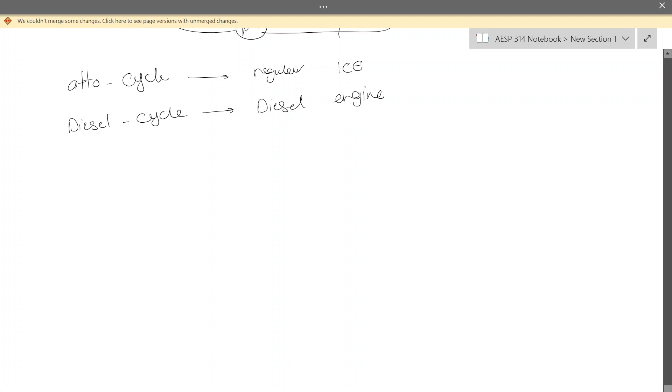We are mainly focused on 3 different cycles today: the Otto cycle, which is the regular internal combustion engine; the diesel cycle, used in diesel engines; and the Brayton cycle, which is used in jet engine design. We talked about these a little already, and some of you mentioned the differences and why they exist between the two. We are actually going to see what those differences are in the cycle.

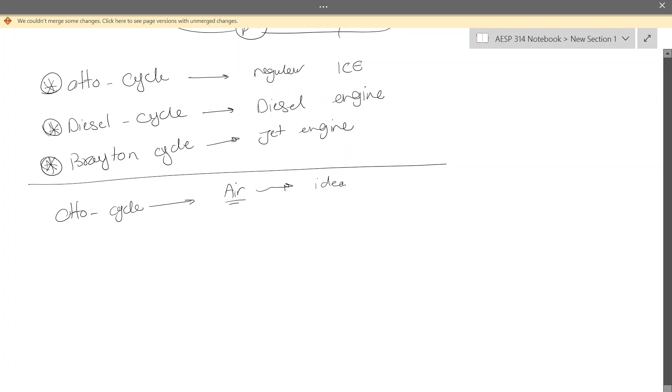Okay, so let's start with the Otto cycle. For the Otto cycle analysis, and for most of the analysis here, we are going to use air as the working fluid, but we will assume air is an ideal gas. This part is actually more important: we are going to replace the combustion process for the Otto cycle specifically with just an instant heat transfer. So heat is transferred instantly to the system, we don't really analyze any combustion here, and there are no exhaust and intake processes. All of the processes here are internally reversible.

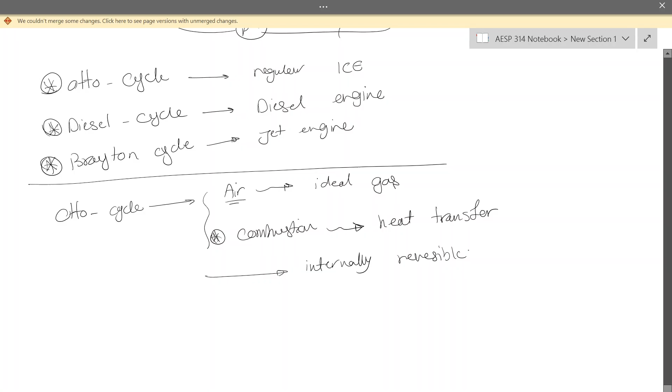We also have an addition to all of these assumptions, called the cold air assumption. In some cases, not always, we're going to use this cold air assumption, which is a very simple assumption: it essentially means that Cp is independent of temperature, so we're going to use a constant Cp for our analysis.

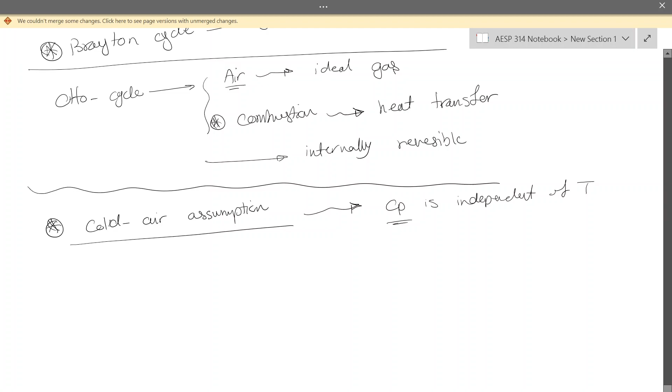Let's do a small review of the formulas we are going to use for this analysis. The first one is the ideal gas law.

Who can tell me what was the equation, the main equation? Yes.

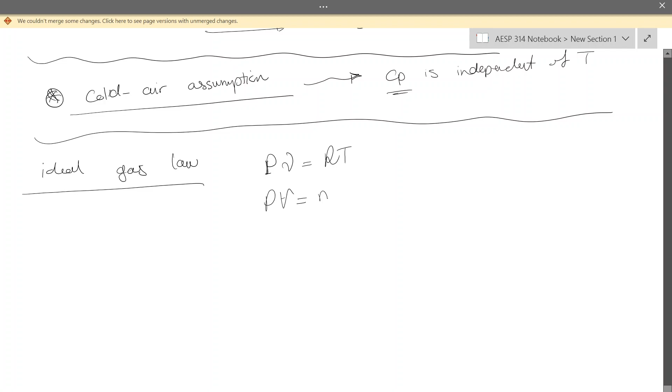PV equals, in aerospace or mechanical engineering we usually use specific volume and RT, or we use real volume and MRT. The reason is we don't really use the universal gas constant, we use a specific gas constant. In this case, it's air.

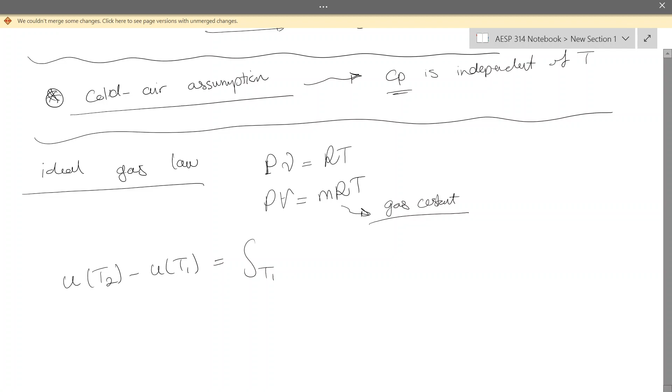We also had the definitions of internal energy and enthalpy. Internal energy at state 2, and these states are identified by their respective temperatures, is going to be equal to the integral of the changes in internal energy, integral of T1 to T2 Cv dt. This is for internal energy.

And also enthalpy difference between station 1 and station 2 is going to be the integral of T1 to T2 Cp dt. So if we apply this cold air assumption, we can actually move the Cp and Cv out of the integrals and take the integral. It is going to be a very simple integral.

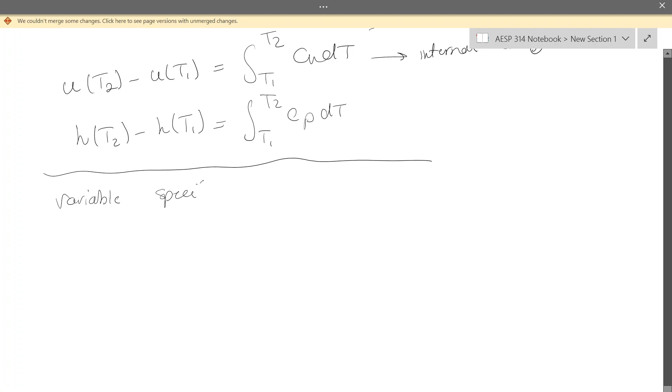That's C of V, that's the heat capacity at... Is this what you are referring to? This V here is a subscript. It stands for the fact that this C, this specific heat, is measured during a constant volume process.

Okay, the same is true for Cp, that's C of P. Yes, exactly, that's the idea. That's the assumption, right? So we can actually move the Cp and Cv out of the integral.

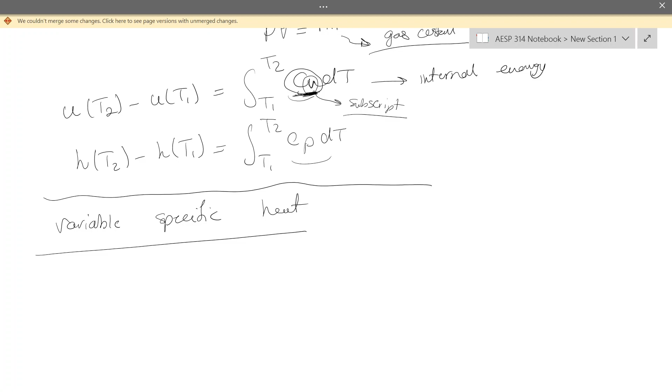Heat capacity in general is constant, it doesn't change with temperature. That's the cold air assumption. But if we could not use the cold air assumption, it is going to mean that we are going to have variable heat capacity.

This variable heat capacity, you can use a host of resources to actually find the relationship between heat capacity and temperature. One of the more famous ones is the NIST or NIST webbook. I have referred to this in the lectures. I'm not sure if you're familiar with the NIST webbook though.

Are you guys familiar with this? It's essentially a computerized thermodynamic table, and it's very complicated. You can just search for this NIST, you can go to the website.

It has a learning curve, so you have to play with it a little bit. But there's nothing scientific to the table itself, it's just you have to understand how to read the data entries and all of those things. It's very useful, you can actually get all of the careful data from this NIST webbook.

Okay, so let's move on with the equation reminders. The other equation we want to talk about is the entropy change.

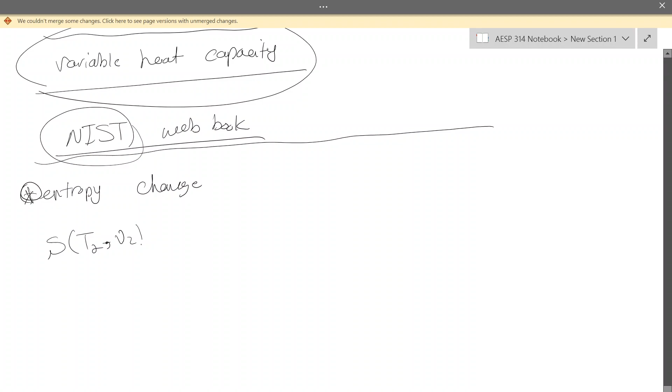Entropy at T2 and V2 minus entropy during station 1, T1 and V1, is equals to, we had two equations for it if you recall. One was the integral of T1 to T2, Cv of T dt divided by T, plus R natural log of V2 divided by V1. And also the other equation is a pressure-based equation.

So what will happen to these equations if we can assume Cp and Cv don't change with temperature? Let's make the assumption. What will happen to this equation? This is a question for the class.

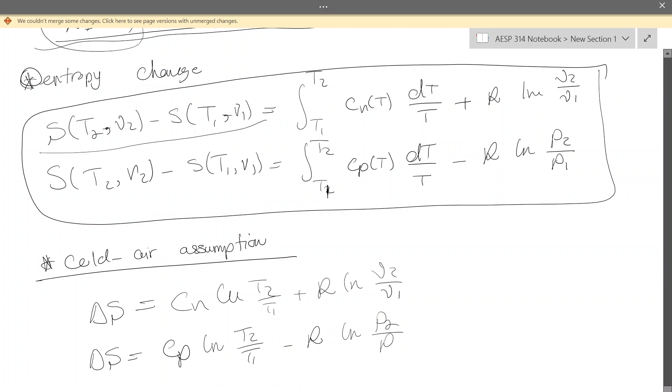or it's going to be Cp, and again this is C of V, C of P, that's a subscript. Natural log of T2 divided by T1 minus R natural log of P2 divided by P1. Okay, so

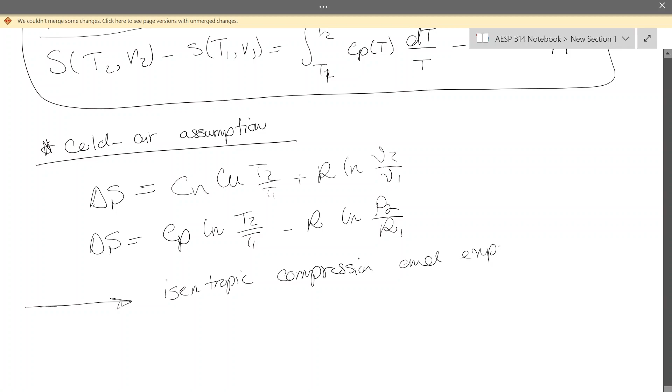what will happen to these equations for isentropic compression and expansion? Exactly. Since it is isentropic, it is adiabatic reversible, and the reversible part is telling us that the delta S is going to be equals to 0.

So 0, Cv... and we are already assuming that it is cold air. All of this is going to be equal to 0 after this assumption. Okay.

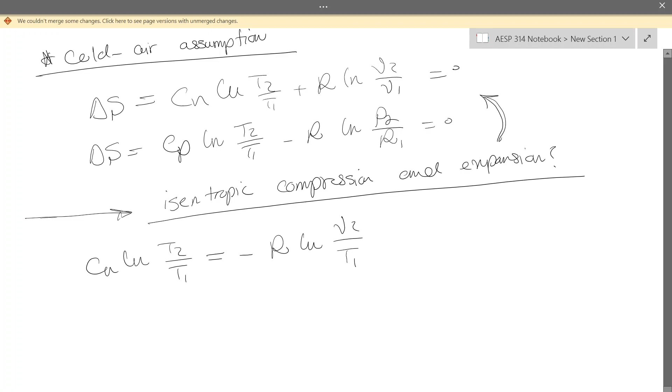So Cv natural log of T2 divided by T1 is going to be equal to negative R natural log of V2 divided by V1. The same is true for the second equation: Cp natural log of T2 divided by T1 is going to be, this time, positive R, P2 divided by P1.

What can we do with these equations? Can we make any further modifications to them? Or can we simplify them a little more? What can we do with them?

How would that simplify things, or how would that give us new information? Let me direct you. Can we move these factors inside the natural log?

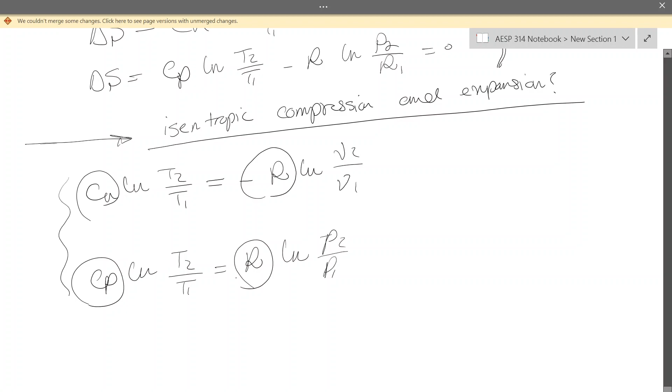We have to split it up, and we raise it to the power, exactly. So we're going to have natural log of T2 divided by T1 to the power CV is going to be equal to natural log of V2 divided by V1 to the power negative 1, negative R. Same is true for the second equation: natural log of T2 divided by T1 to the power CP equals natural log of P2 divided by P1 to the power positive R.

Since all of the natural logs are equal to each other, these parts also have to be equal to each other, so we can say T2 divided by T1 to the power CV equals V2 divided by V1 to the power negative R. The same is true for the pressure equation.

So what is the relationship between R and CP and CV? Does anyone remember this? R, if you recall, we define as CP minus CV, right? So let's do that here. CP minus CV — there's a negative sign here, so it's going to be CV minus CP, right?

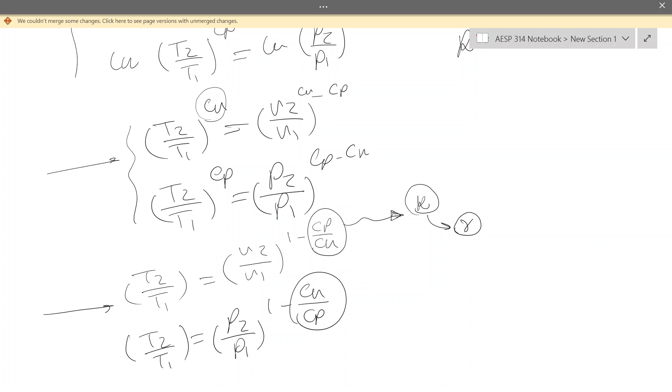And these are the isentropic relationships, right? You can actually relate pressure and volume as well: P2 divided by P1 is V2 divided by V1 to the power negative K, or negative gamma.

So for the second part of the class, starting next week, we are going to use gamma, not K. The reason I'm using K now is because the thermodynamics book uses K. Okay, any questions?

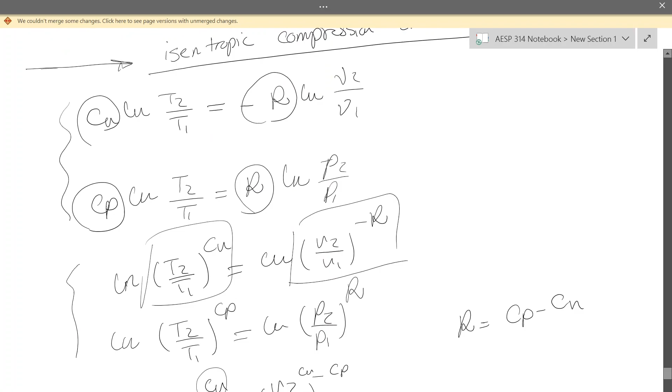Have you seen these before? Is this something you've seen before? Way back in thermal, yeah. So these are the isentropic relationships, right? And these are the relationships we are going to use a lot. The reason I focused on them is because I wanted to make sure you understand that these relationships only apply to an isentropic case, right?

And we also already made the assumption that we have cold air, meaning that CP doesn't really change with temperature, right? So if any of those assumptions were incorrect, you can't really use isentropic relationships. This is something you have to keep in mind.

Any questions? Yes? Sure. Yeah, so R is CP minus CV, negative R is CV minus CP, right?

And what is the relationship between specific volume — and this is a specific volume — so what is the relationship between specific volume and density? You have to speak up, guys, be a little more confident. A specific volume is 1 over density, right?

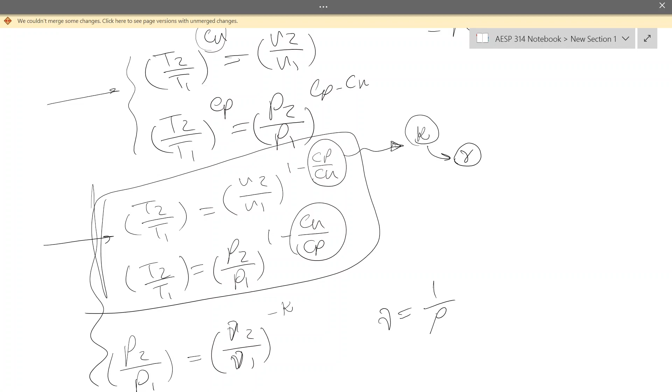Yes? Can we just notate the CV over CP as inverse K? Can we notate the CV over CP as inverse K or gamma? It is inverse K, yeah. I didn't simplify this — it's just going to be 1 over K or 1 over gamma.

Okay. Let's actually still give you a minute.

So let's move on to the Otto cycle. Let's move on to the cycle itself.

Otto cycle. So let's actually draw the PV diagram and also the TS diagram.

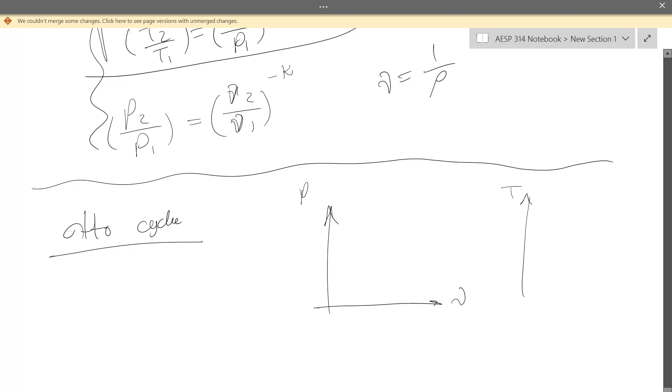For the PV diagram, we are going to start at 1, go to 2 during an isentropic compression. This is where your air-fuel mixture has already entered the cylinder, and you're compressing it. Then the next step is going to go from 2 to 3. This is a constant volume process.

So, constant volume heat transfer. This is where the combustion happens, but the idea is we are going to replace combustion with just a regular simple heat transfer. And then the next process, and these are not straight lines - just keep in mind 1 and 2 are curved, because this is an isentropic process.

Then we are going to go from 3 to 4, doing another isentropic process. This time, this is after the combustion, so the piston is moving down. We are expanding - isentropic expansion. And then the last one is going to be the heat removal or heat rejection, constant volume heat rejection.

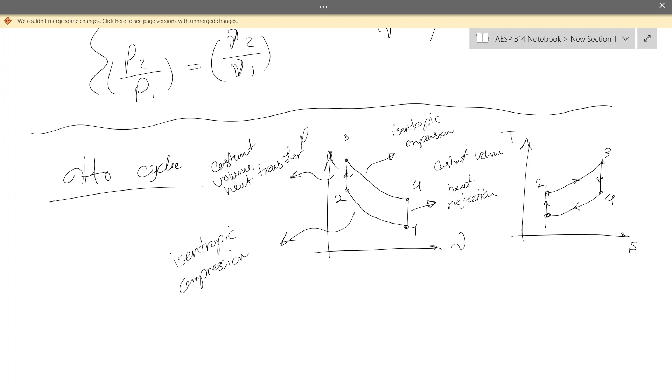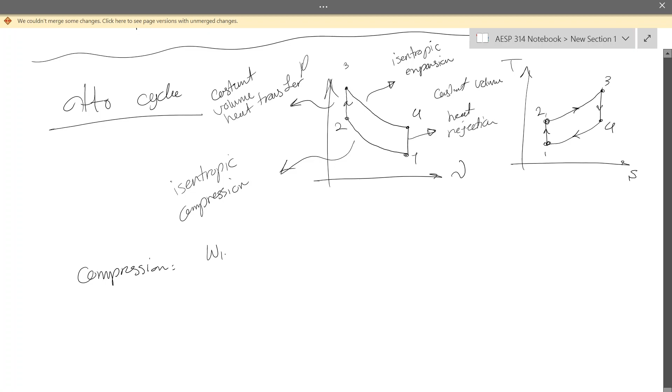So, as far as we are concerned, these are the 4 states of an Otto cycle. During the compression, we of course are going to have some work. How can we calculate the work here? That's the work from 1 to 2 divided by m.

The difference in the internal energies. For the Otto cycle and diesel cycle, we mostly use internal energy, unlike the Rankine cycle. But for a Brayton cycle, we are going to use enthalpy. So we're going to go back to enthalpy. And for most of the class, we are going to use enthalpy, because for most of the class we are going to use a Brayton cycle.

And that's the 1 to 2. Then we have the heat transfer 2 to 3, or combustion, that we are going to assume is just a regular heat transfer. And we have Q from 2 to 3 divided by M is U3 minus U2. Then we have expansion, W from 3 to 4 divided by M is U3 minus U4, and then we have the heat rejection.

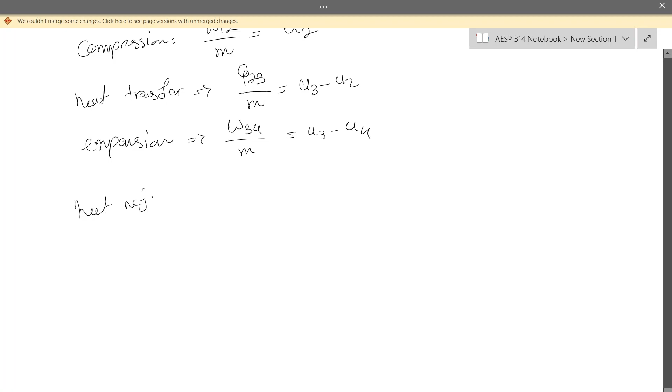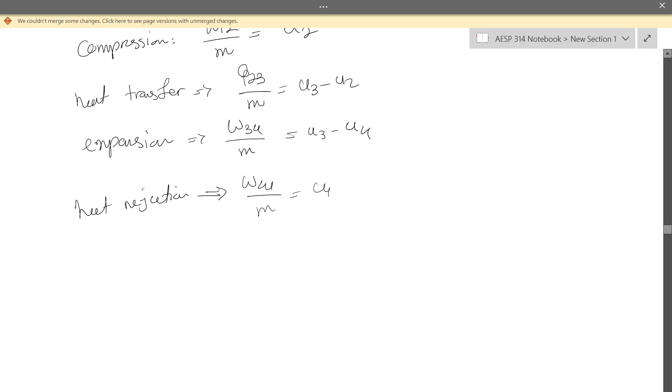4 to 1 is going to be U4 minus U1. U3 minus U4 - the reason is we want to keep the sign positive. But in general, we are losing some energy, so essentially it has to be a negative value. That's... compression is U2 minus U1.

Okay, so how can we calculate net work of the cycle? Work 3,4 minus work 1,2. Why would you do 3,4 minus 1,2? Exactly, it is energy being delivered to the surroundings, and this is what we are looking for. So we can actually use this: U3 minus U4, minus U2 minus U1.

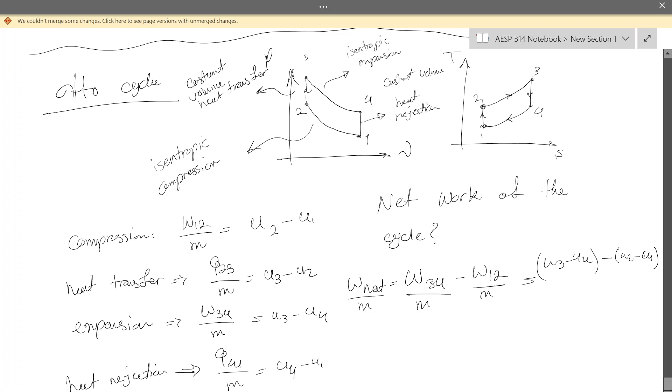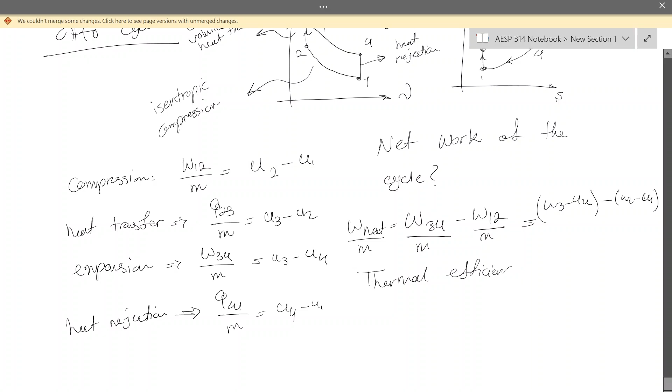What about the thermal efficiency of the cycle? How can we calculate the thermal efficiency of the cycle? Net work over Qin, which essentially means that is going to be W3,4 divided by M, minus W1,2 divided by M, divided by Q2,3 divided by M. And all of these M's actually get cancelled out, so we can remove them. This will be the definition of efficiency of the cycle.

The reason I asked this was I wanted to make sure that you remember that efficiency of a cycle is the net work of it divided by the energy input - so how much net work you are getting out of the energy you're putting in. And that's going to be the efficiency of the cycle.

Can we actually use the Q's, the heat transfers, to calculate the net work of the cycle? Yes, we have one. So what is the equation? Q23 divided by M, minus Q41 divided by M. And the reason is - why can we use this equation instead of the work equation? Conservation of energy, exactly. So this amount of energy has to be equal to whatever heat input is and whatever heat is rejected from the system, whatever waste energy we have.

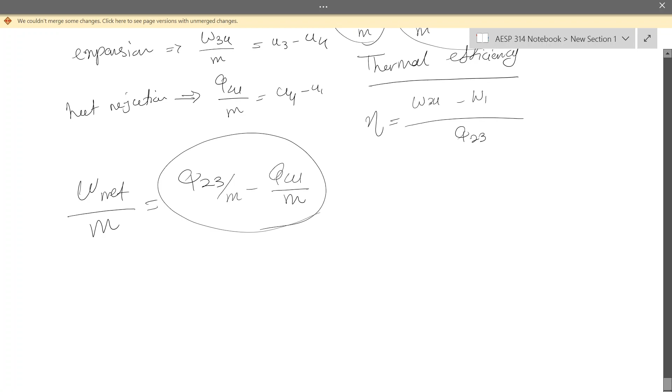Okay. Any questions here?

Whenever it comes to gas cycles, we have something we need to always be aware of, and that's the compression of that gas. We are going to compress the air here. We have a compression, we have an expansion. The same is true for all of the gas cycles. So that compression ratio is actually a very important factor when it comes to this gas cycle analysis.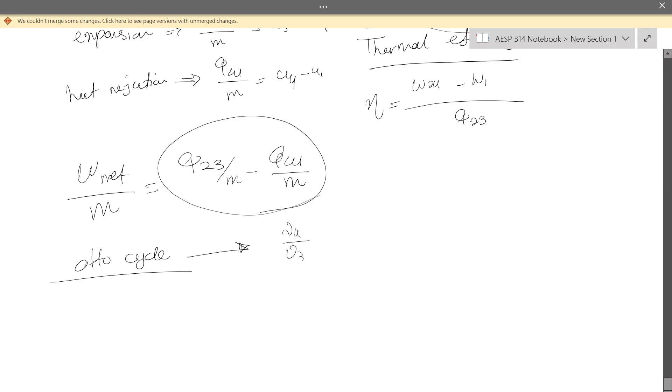How do we define the compression ratio for the Otto cycle? Just based on definition, it's the volume at stage 4 divided by the volume at stage 3.

At stage 3, supposedly, we have the most compressed state of the cycle. And at stage 3, this volume is going to be similar to stage 2, and this state. So the most expanded state divided by the most compressed state is going to give you the compression ratio.

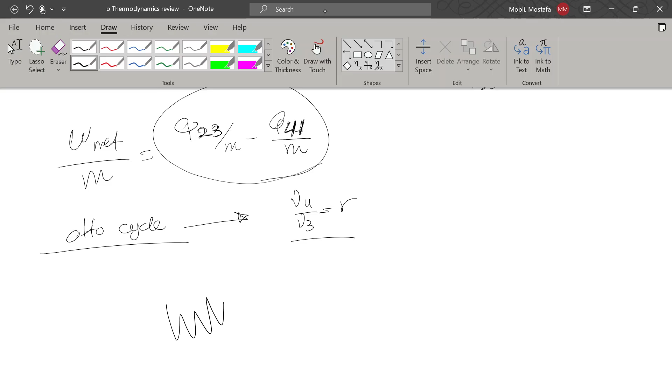Q41. Let me zoom in a little bit. I think it's going to get... let me make this. Okay. How can I change the size here?

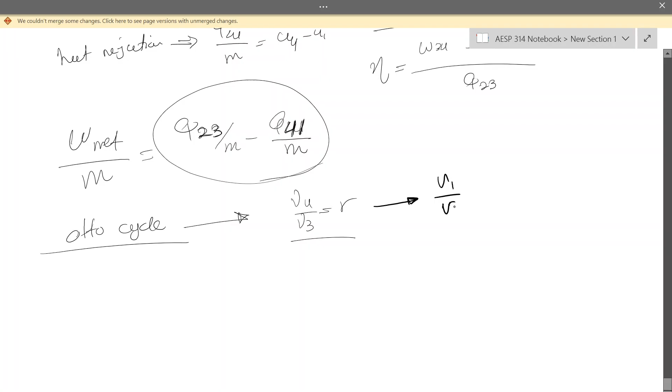Okay, so the compression ratio can also be written using V2 and V1. So V1 over V2 is going to be equal to R as well, mainly because V1 and V4 are the same, V2 and V3 are the same.

And we can use this ratio to rewrite the isentropic equations. So for this cycle, if I want to find the temperature ratio using the compression ratio, we already have this equation. What is going on here?

We already had this equation: T4 divided by T3 is V4 divided by V3 to the power 1 minus K. And V4 divided by V3 is defined as the compression ratio. So we can actually rewrite this as 1 over R, K minus 1 - doesn't really matter.

And we can also do this for T2 divided by T1, which is going to give us the same thing, just in reverse. So T4 divided by T3 is going to be 1 over R to the power K minus 1. T2 divided by T1 is going to be R to the power K minus 1.

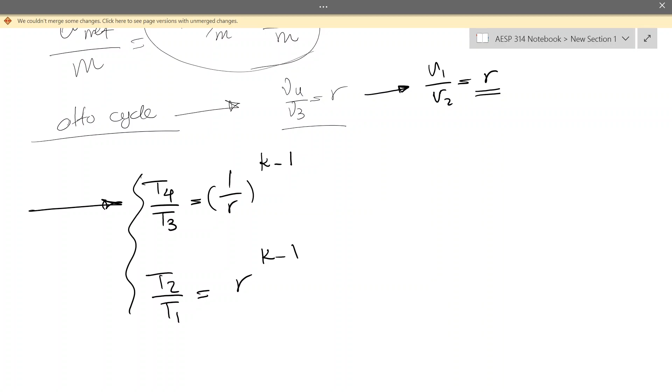Okay, let's start from Nicholas and go one by one. I want to multiply the two equations. What will happen to the equation and what can I conclude from this operation? There are two equations - this is equation 1, this is equation 2. I want to multiply them together. What will happen? The answer can be 'you don't know,' that's all right. The reason I'm going one by one is because I have a feeling you guys are falling asleep, which is, of course...

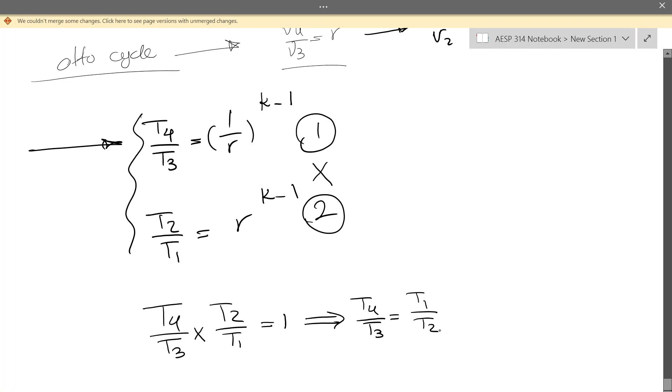Okay? Exactly. I guess we have to stop at the question - what's that? T4 over T3 multiplied by T2 over T1 is equal to 1, which essentially means that T4 over T3 equals T1 over T2. That's it. Is everyone awake? If you want to fall asleep, we can all go home and sleep in our beds.

So, I mean, you know me, I don't really have any problem with finishing the class earlier than the supposed time.

Okay, we can actually rewrite all of the efficiency equations based on the compression ratio. Just plug in the formulas you already have, and we can simplify the efficiency to 1 minus T1 divided by T2, which can also mean that eta equals 1 minus 1 over r to the power k minus 1.

Okay. There's a long way between this equation and this equation, and this is actually proved in the lecture notes. But since I want to make sure you understand how we get from there to here, we are going to have a bonus point here.

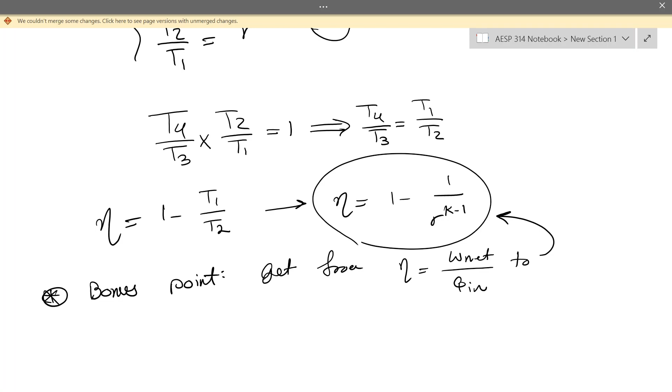Okay, so let's move on. This is all of the analysis we want to do for the Otto cycle. Let's move on to the diesel cycle, and this is also the air standard diesel cycle.

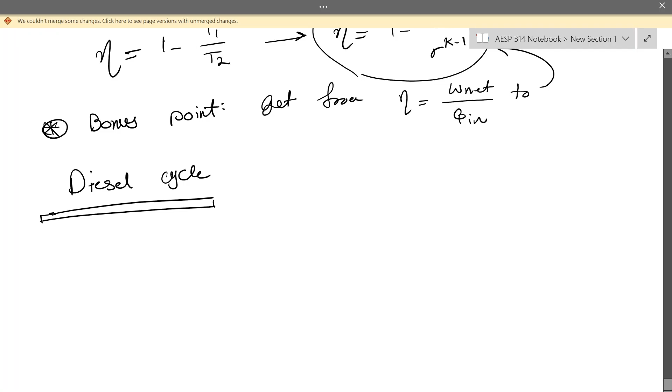We talked about the differences between the regular internal combustion engine, or Otto cycle, and the diesel cycle. What do you think the differences are when it comes to the processes involved in the cycle? For the Otto cycle, we had a constant entropy or isentropic compression, a constant volume heat transfer, isentropic expansion, and then heat rejection.

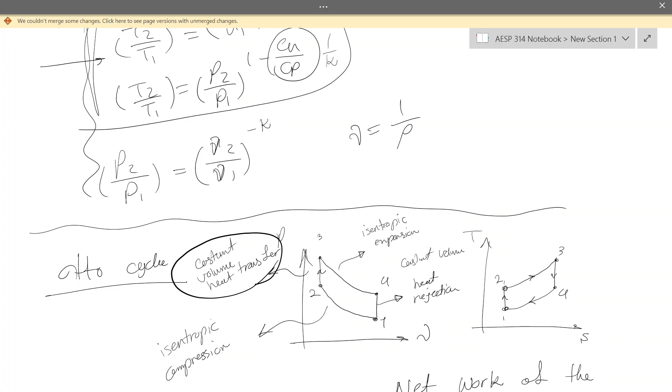This part essentially means that when you compress your air completely, there will be a spark, and the assumption we're making is all of the air-fuel mixture is going to burn instantly. That's from 2 to 3. During that combustion process, there is no volume change. So it will combust, and then the next process starts, which is the isentropic expansion.

But if you recall from last week, what did we say was one of the main differences? There is no spark - it's just a straight compression. So what will happen to the air-fuel mix? Why do you need the fuel then? Because the fuel is not going to combust by itself in the Otto cycle - you need a spark. In theory it will combust, but in reality it doesn't.

The gas ignites by itself - it heats up to a point where it ignites, gets to vapor, and basically will combust. In the diesel engine or diesel cycle, what happens is it will take longer for the air-fuel mixture to combust, because of the nature of the fuel, the design, whatever that is. It will take a little bit longer, which means we have already started the expansion process.

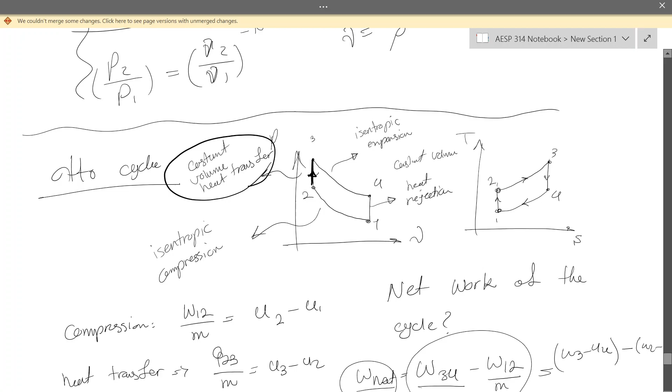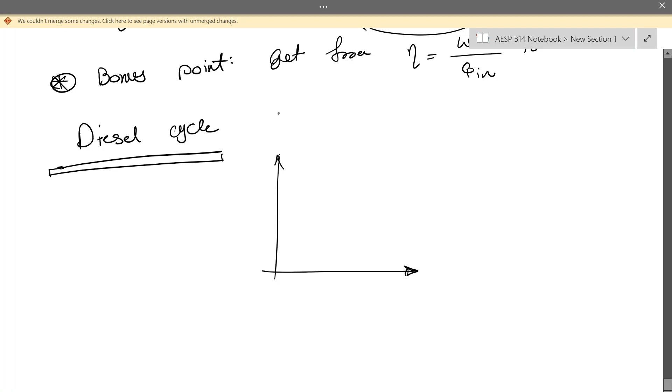So this process here, we don't have by design in the diesel cycle. What do we have that replaces this? Based on the design, it's actually going to be an isobaric process for the heat transfer. And what is an isobaric process? It is essentially constant pressure. So instead of constant volume, we're going to have a constant pressure process, during which we have some expansion and also heat addition.

And the exhaust part is going to stay constant volume. So this first process is still isentropic. This second process is going to be isobaric. This third process is isentropic. And this fourth process is constant volume.

So what does it mean? Everything else is the same - constant volume, everything else is the same, and we should be able to use all the equations we've already had for this analysis. But when we say we have an isobaric expansion, what does it mean for the work and also the internal energy? It essentially means that we have heat addition as well as work.

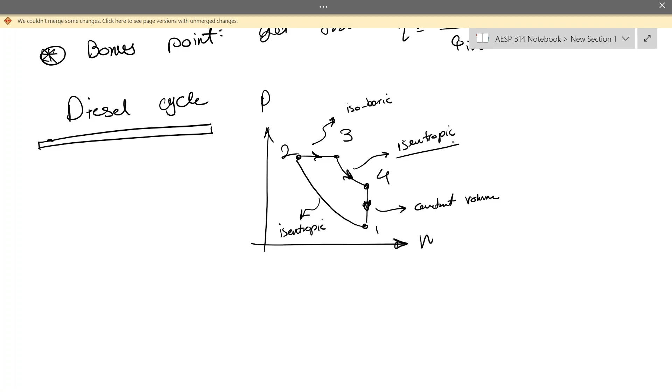In the previous process it was constant volume - there was no work being done by the system or on the system, so we could have just used Q for the system. But here, we definitely need to include, in the 2 to 3 process, the heat addition process, we need to include the work that is being done, the volume change.

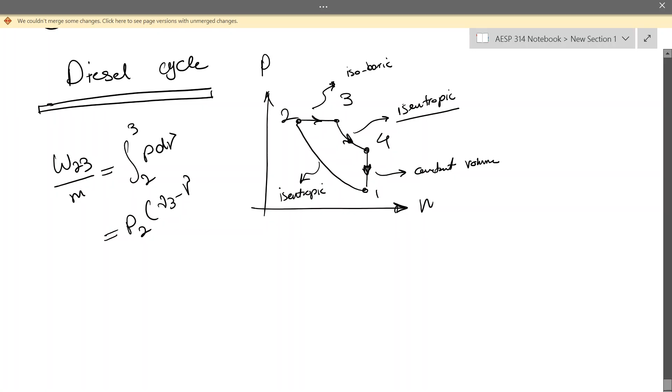The total heat is going to be affected. So the work being done in this process is the integral from 2 to 3 of P dV, which equals P2 times (V3 minus V2). And the changes in internal energy in general is going to be M multiplied by (U3 minus U2), in this process, 2 to 3.

Based on the first law, all of this is going to be equal to Q in that process, the heat addition, minus the work being done by the system. So M(U3 minus U2) is going to be equal to Q(2 to 3) minus P2(V3 minus V2).

If you rewrite this - and this is divided by M, so this is also divided by M - if you rearrange this, what you get is Q equals U3 minus U2, plus P2 V3 minus V2.

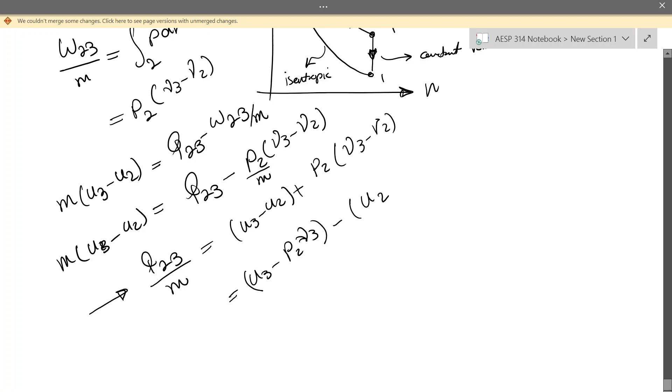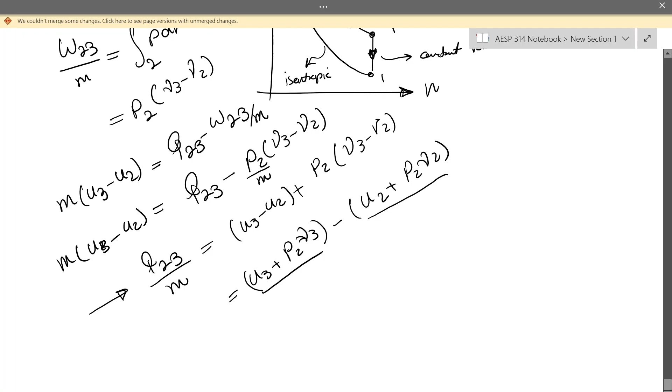Let's put all of the 3's together: U3 plus P2 V3. Keep in mind that 2 to 3 is an isobaric process, so P2 and P3 are the same. Minus U2, this is a plus, plus P2 V2. What do these two remind you of? This is essentially the definition of enthalpy. So for a diesel cycle, unlike an Otto cycle, your heat addition is actually going to be H3 minus H2, the enthalpy at state 3 minus the enthalpy at state 2.

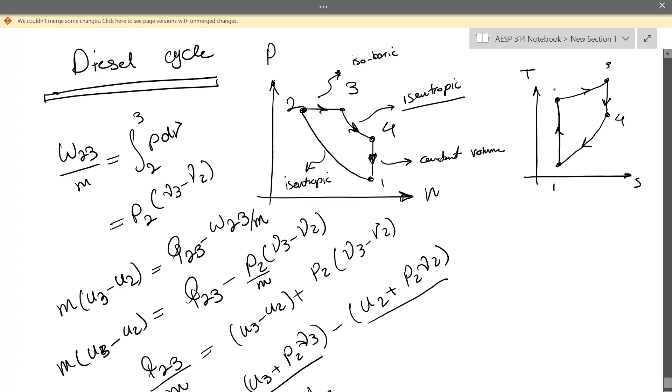Everything else is going to remain the same. We also didn't talk about the TS diagram. On the TS diagram, the temperature rise between station 1 and 2 is going to be higher than the temperature decrease between 3 and 4. So it is not going to be exactly the same as the Otto cycle. It's going to be a little different.

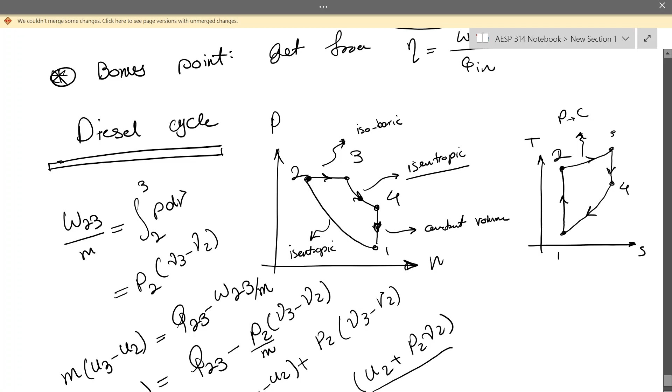This is an isobaric process, pressure constant. This is an iso-volume process, volume constant. So how can we calculate the W naught net, or W of cycle? We can use the work input and output of the system, or we can use the Q's. It doesn't really matter.

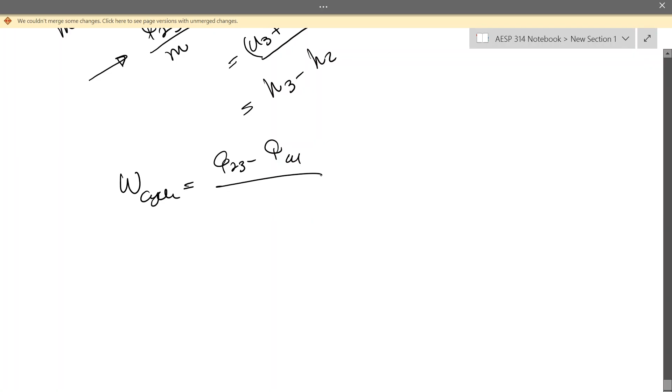The efficiency we can calculate as W net divided by Q in, which is going to be equal to 1 minus U4. If you do that simplification, if you plug in the equations, you will get to this eventually.

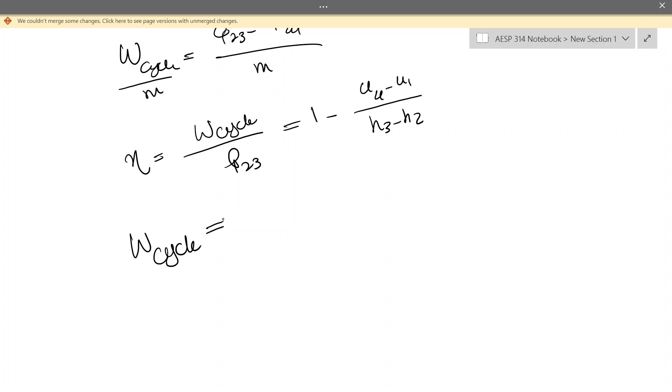Let's actually talk about this. So how can we calculate the W of cycle using the work in our system, instead of Q? Here we calculate it using Q, we have the enthalpy, we have all of the things that we need. How can we calculate this using W?

We have 3 different works being done on the system or by the system. One is from 2 to 3, which wasn't there before in the Otto cycle. The other one is from 3 to 4, and the last one is from 1 to 2. This is going to be your W cycle. So we can put this inside here and use this W cycle for the efficiency calculations.

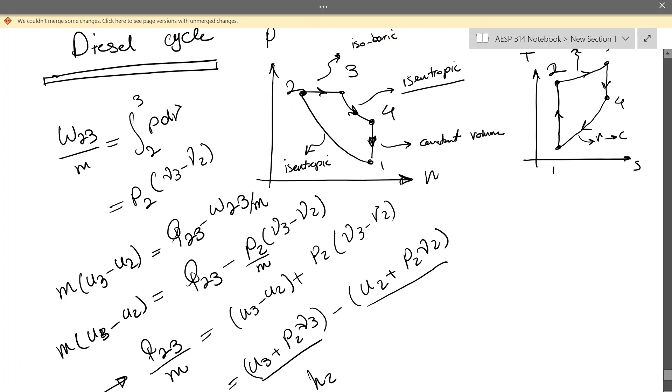Yes? What's that - where does the W23 come in? Like, what part of the process does that happen? How do you calculate work? Think of the equation.

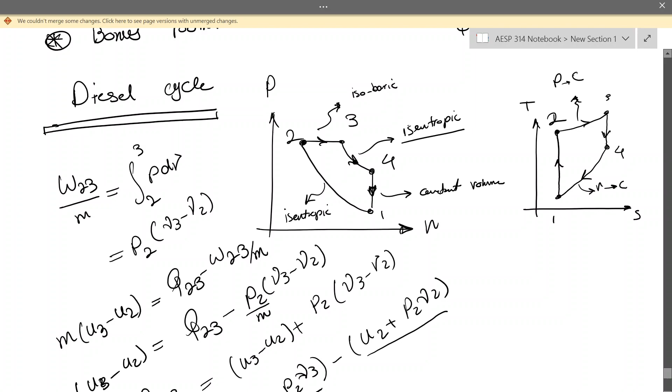Isobaric doesn't mean no work is being done, right? What was the equation that we use to calculate it in general? Look at this - what was the equation? This is the general equation we use for work, right? So whenever you have volume change, you are either doing work or work is being done on you, on this cycle.

Okay, we can actually do the same thing. I'm just going to give you the equations here, I'm not going to go over them. Let's give you one definition and a couple of equations.

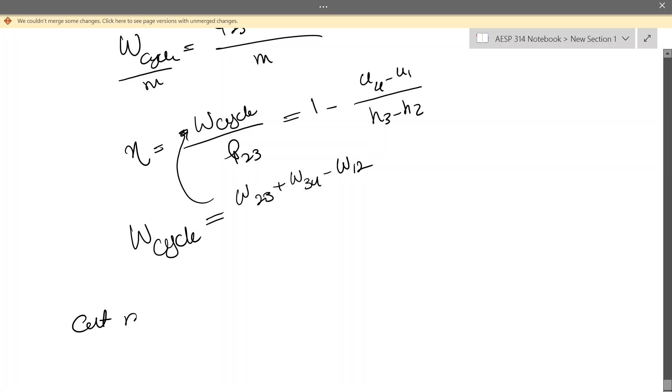We have the cutoff ratio. That's the ratio at which we decide that we are at state 3, and then we are going to move to the other process. So there is a cutoff value, after which this isentropic process starts, because we already are having expansion, and the expansion doesn't stop, it just continues. There is a cutoff value that is going to tell us that the pressure is going to change, which means we are going to go from 2 to 3 to 3 to 4.

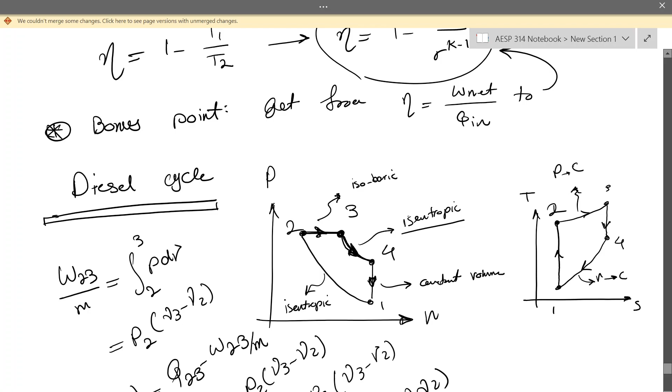And that cutoff ratio is defined by the volume. RC is defined as V3 divided by V2, which is going to be equal to T3 divided by T2.

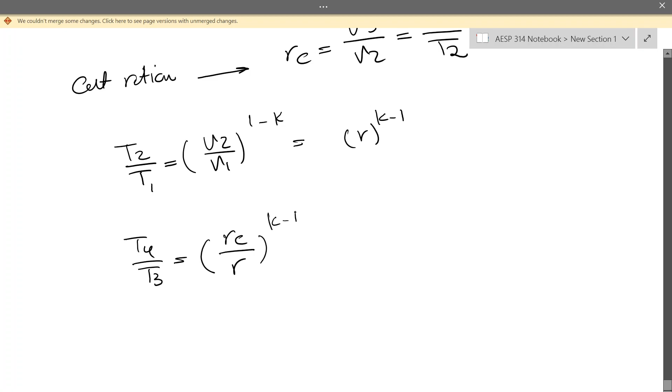We still have the compression ratio, the same as before. So your isentropic relationship for a diesel cycle is going to be like this: V2 divided by V1 to the power 1 minus K, which means that is going to be R to the power K minus 1. And we also have T4 divided by T3, which we can actually use the cutoff ratio and the compression ratio here, RC divided by R.

Based on this, your eta, or efficiency of the diesel cycle, is going to be equal to 1 minus 1 divided by R to the power K minus 1. This part of it is exactly the same as the previous part, but then we have the cutoff ratio to the power K minus 1, divided by K multiplied by RC minus 1.

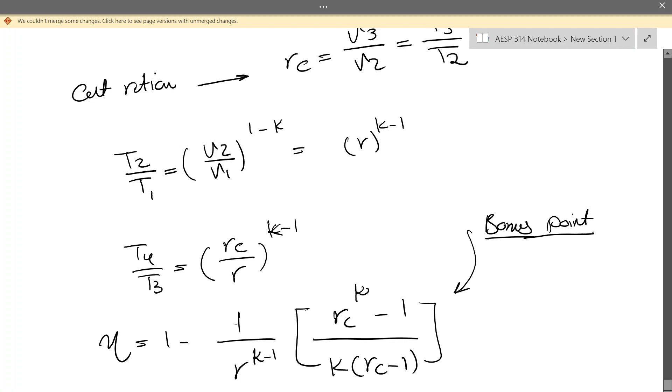And this is also getting from the regular definition of efficiency to this - this is also another bonus point, and again, it is included in the lectures. Lectures are uploaded, you just have to go there and copy this. Very easy, yes - it's RC minus 1, RC raised to K minus 1.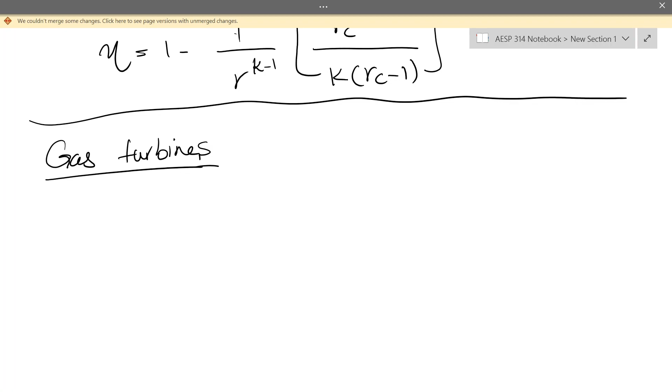Okay, let's talk about the gas turbines. I'm moving a little quickly here to make sure that we are covering everything. Gas turbines, or the Brayton cycles, are essentially the things that we are going to focus on in this course.

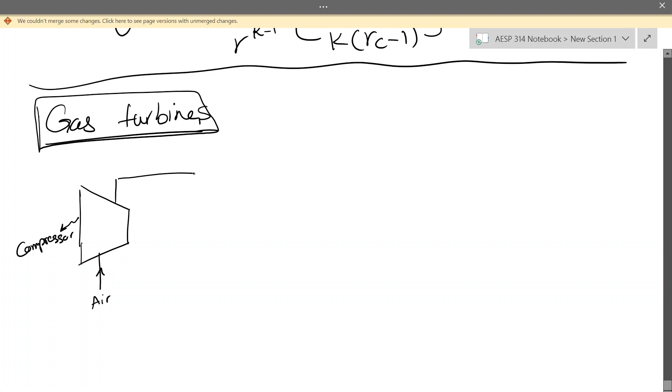As I have said many times, gas turbines are usually comprised of a compressor - then you have your process 1 coming in, air comes into a compressor, and then it goes to the combustor where you inject fuel. So this is called a combustor or combustion chamber, it doesn't really matter. And then this goes to a turbine.

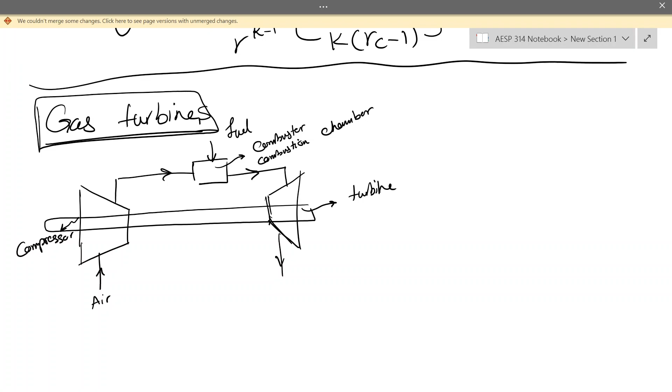From the turbine, you are going to have the exhaust gas. Turbine is always connected to the compressor using a shaft, so some part of the work generated by the turbine is going to be used by the compressor to compress the incoming air. That's the idea here.

This is called an open loop Brayton cycle. We can also have a closed loop Brayton cycle in which a heat exchanger is used. We talked a little bit about heat exchangers before, so you should understand what they are. You don't need to do any analysis, as long as you understand what they are, should be fine. You should have learned this in Thermo 1.

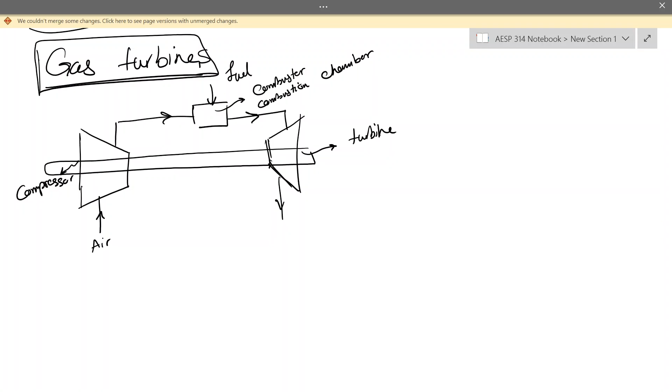So this can be a closed loop or an open loop. In propulsion, we mostly deal with open loop Brayton cycle because the thrust generated is a very important factor for us. So open loop is going to be the way to go. The analysis here is exactly the same as before. As long as you understand one cycle analysis, you will be able to understand all of the cycle analysis.

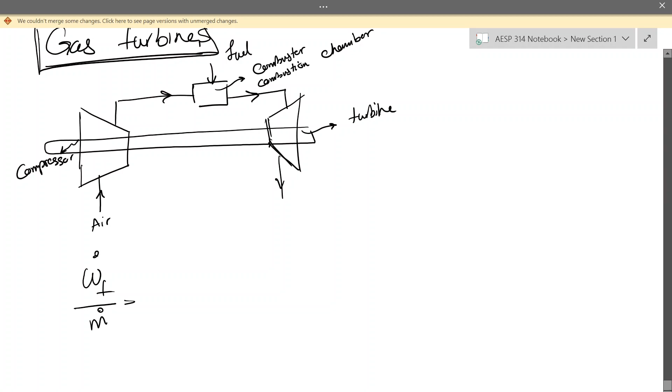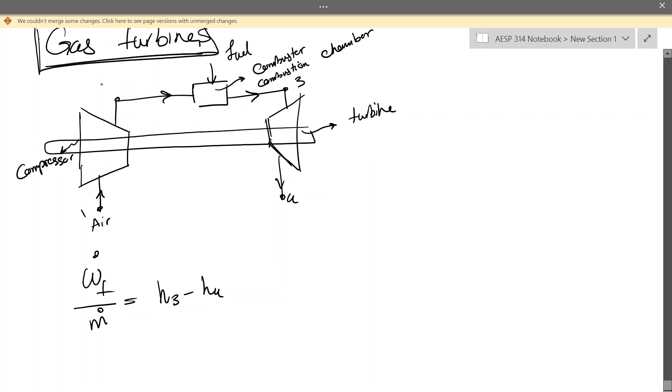The work in the turbine, W of T, is H3 minus H4 - this is state 3, state 1, state 2. The work in the compressor is H2 minus H1. The combustor heat addition, which we usually use Q dot in for, is H3 minus H2. And the heat rejection, Q dot out divided by M dot, is H4 minus H1.

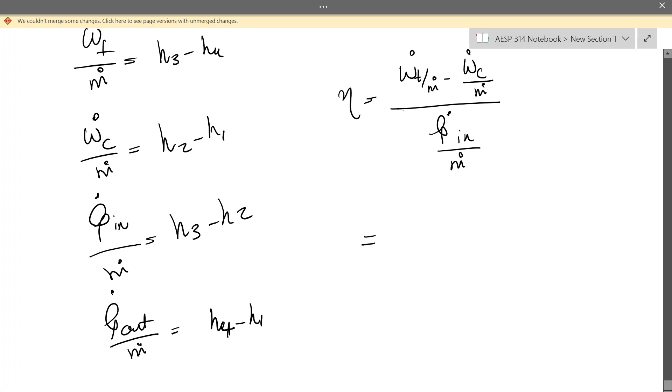Cycle efficiency, same idea: W dot of turbine minus W dot of compressor, divided by Q dot in divided by M dot. You just plug in all of the values, and this is what you are going to get.

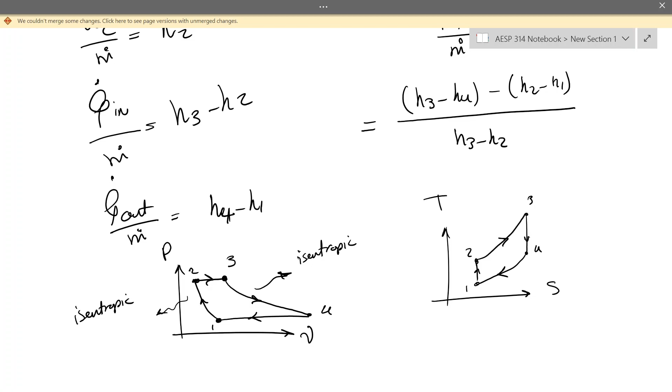In the Brayton cycle, unlike the Otto cycle and the diesel engine cycle, where the compression ratio was the key factor, we have the pressure ratio as a very important definition here. Pressure ratio is P2 divided by P1 in a Brayton cycle, which essentially is the same as saying P3 divided by P4, because of these isobaric processes.

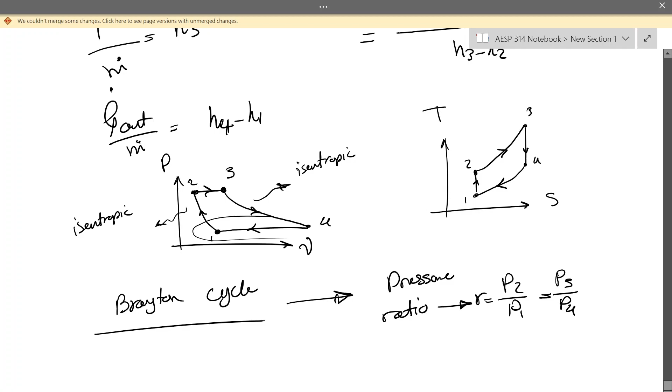So you see the difference between the Otto cycle, the diesel cycle, and the Brayton cycle - it essentially comes down to this process. In the Otto cycle, both processes were isovolume. In the diesel cycle, one of them was isobaric. We also have the combined cycle, and we're going to show an example of that in the next lecture.

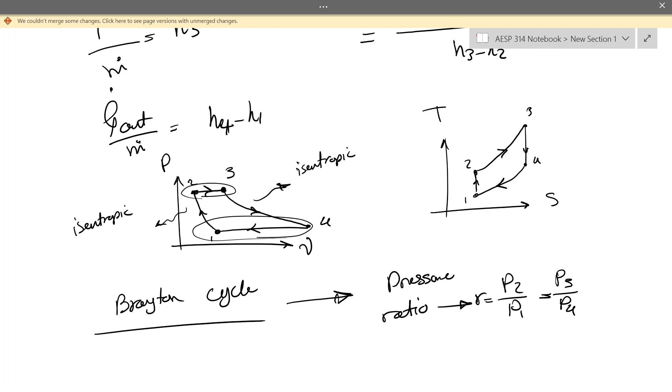Is there any questions? Yes. Sure. Let's see.

There are a couple of things that I really didn't go over, like some explanations or what the limits are. I definitely recommend going through the lecture yourself and reading over those. I'm pretty sure you will be able to figure them out.

So there are a couple of explanations we didn't really talk about. A student asks whether that efficiency factor ties in with Oswald's efficiency factor at all, or are they entirely separate, relating to the aerodynamic wing efficiency factor for single-prop airplanes. The response clarifies there are millions of different types of efficiencies in the design of a car, aircraft, or power plant - engine efficiency, combustor efficiency, compression efficiency, wing efficiency - and eventually you have to come up with an overall efficiency that includes all of these.